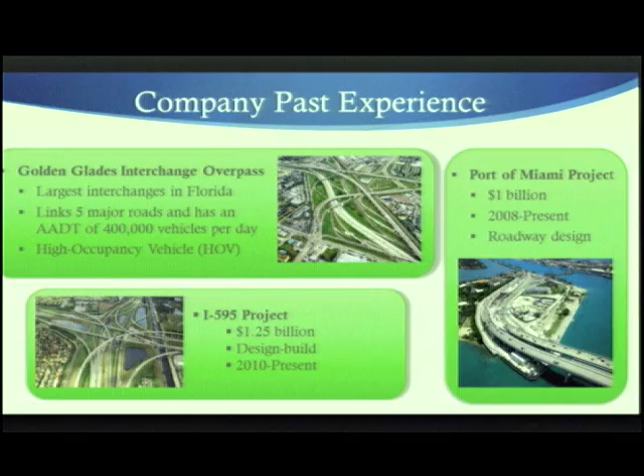Hi everyone, I'm Michelle Brioso. Today we'll be talking about our plans for the Bridge 5 Ramp F. It's a 2-lane ramp which will connect Spanish River and FAU Boulevard North to Interstate 95 northbound. In the following image, you can see Bridge 5 Ramp F highlighted in yellow. This project takes place in Palm Beach County, which offers a wide variety of living and recreational locations. In this county and in the nearby area is Florida Atlantic University. This university has seen a consistent increase in student population, and with that comes a need for expansion and a demand for this interchange.

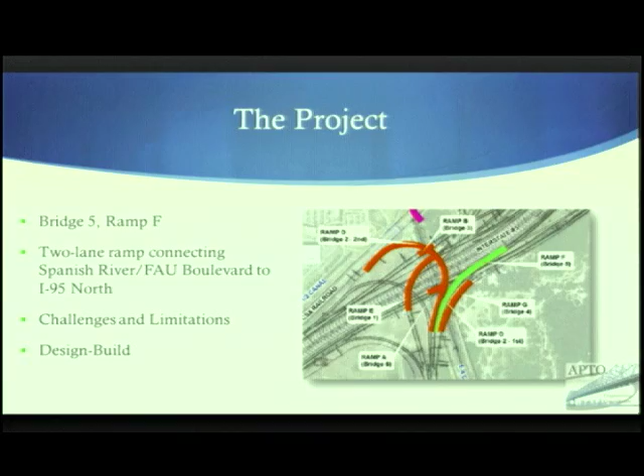Throughout this project, we're going to face several challenges and limitations, including the Boca Raton Airport and the crossing of the El Rio Canal. This will be a design-build project in which Apto Engineering plans to oversee all phases of the design and the construction. Through the construction of this project, Apto Engineering plans to create easier access routes and alleviate the traffic for those who attend the university and those who commute to and within the area. It is our goal to ensure that there is a safe and environmentally friendly working environment, not only for those who are working on the site, but those who are commuting within the area. We also want to minimize the public impact that this construction will have. It is our goal at Apto to ensure that the project is within the expected delivery time and within the proposed budget.

We also want the aesthetics of the bridge to fit within those of the Boca Raton area, and our intention is that the decorative features and the functionality of the bridge will help to increase property values of the adjacent zones. I'll now pass it over to Jake Van Dyke, who will discuss the scope of our project.

Thank you. Hello everybody, I'm Jake Van Dyke. I'll be the structural lead for this project. I'll be going over the scope of the project right now. First of all, APTO will provide all the design and construction related services for this project. We will work thoroughly with our clients from the concept phase all the way to the final design of the project and the release of the project.

Our company will provide the client with effective designs and make sure that these designs are put into reality using efficient construction methods. Our company primarily uses the critical path method to ensure minimal construction period times. Some challenges that we might encounter during this project are the actual construction of the bridge. As we see, the bridge crosses El Rio Canal. So pier number 2 of the bridge will be very close to this canal, so any extra support that we have to take into consideration for this pier.

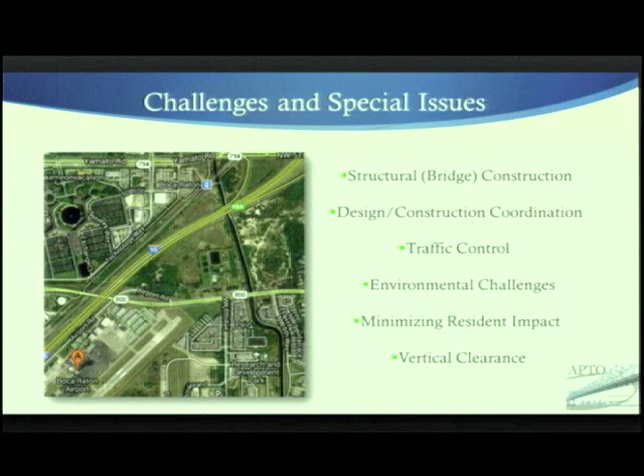In the design phase, our company will provide all the necessary investigative work so we can fully utilize the client's resources while exceeding the minimum engineering requirements. Our company will identify any inefficient designs or design flaws and propose to the client effective solutions. For this project, we will provide all the necessary documents and plans to ensure a hassle-free construction.

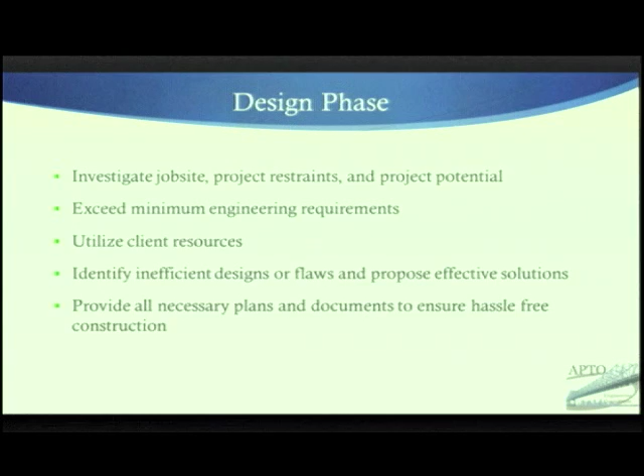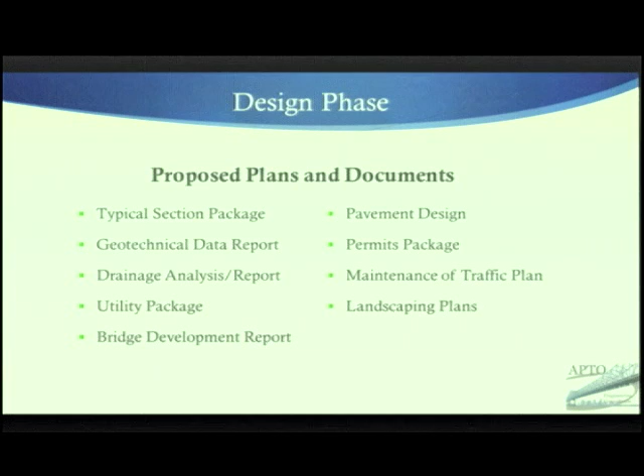Here you have a list of the documents and plans that we will be providing. As you can see, we will provide a typical section package. We will provide geotechnical report, utility package, landscaping, permits. As we said, all the details will be handled by APTO and its subcontractors.

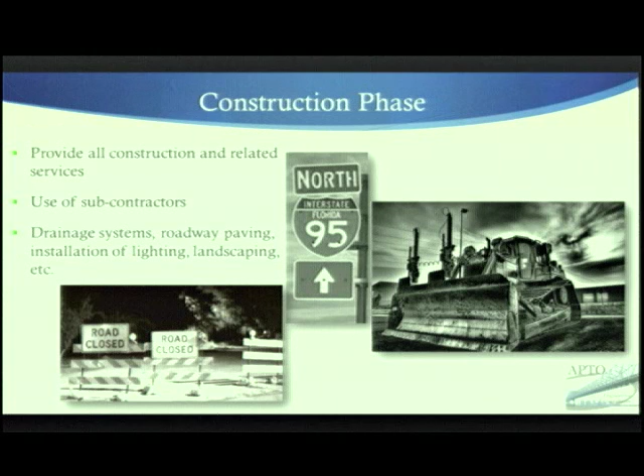The construction phase, as we mentioned, we will provide most of the construction services, and we will sub out some of it. We're aiming for at least 10% DBEs to ensure the FDOT 8.6% minimum. We will construct the drainage system, the roadway pavement, and the subcontractors will be used for the specialty services to ensure that these specialty services are of high quality, such as installation of lighting and landscaping. Now I will hand the floor over to Mr. Felix Santiago, who will go over the quality management. Thank you.

Thank you, Jake. As mentioned, my name is Felix Santiago. I'm going to go over the quality management plan and the public awareness plan. In order to ensure that we follow FDOT design and construction requirements, we have put together a quality assurance and a quality control plan. APTO prides itself in providing high quality work and exceptional job satisfaction. Some elements in which our quality management plan focuses on are detailed planning, coordination of construction and material sampling, teamwork and communication with the client, the community, and the company.

The project takes place in Palm Beach County in the city of Boca Raton. We have to account for the FAU campus, which is adjacent to I-95. In addition to that, some undeveloped property and industrial properties are also adjacent to I-95. We must also take into account the Boca Raton Airport, which is nearby, which will affect some of the construction requirements, as well as any residential neighborhoods and local businesses which are close by the project.

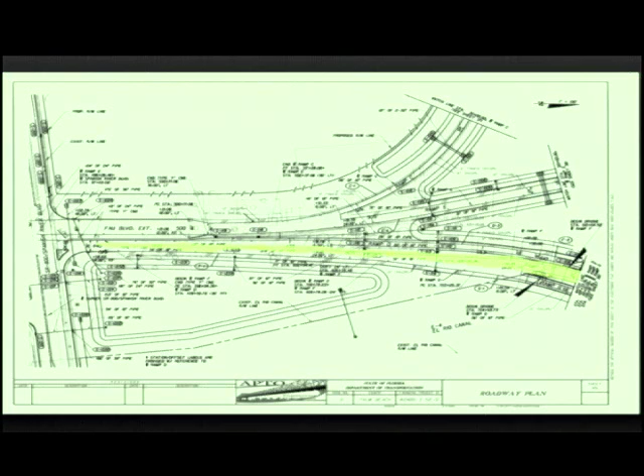The highest crane right now out there for 2013 is 179 feet, and we propose our bridge is about 33 feet in elevation. We will definitely stay within the minimum distance as coordinated with the FAA administration.

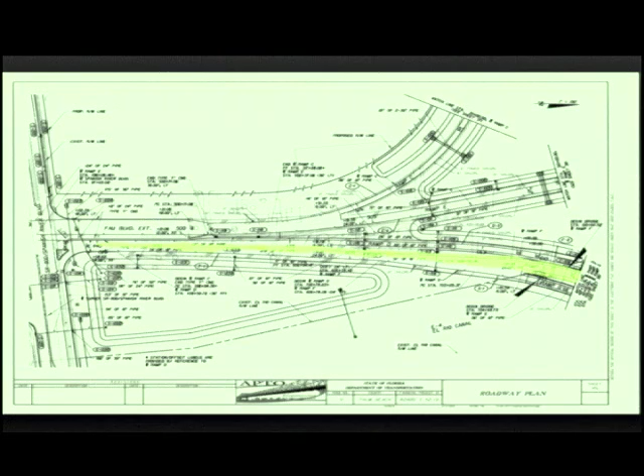Also, in order to guarantee a smooth transition from an initial 35 mile per hour design speed to 45 mile per hour design speed onto I-95, we will use a maximum super elevation of 8%, transitioning from about 400 feet from the start of our project to the end of our project.

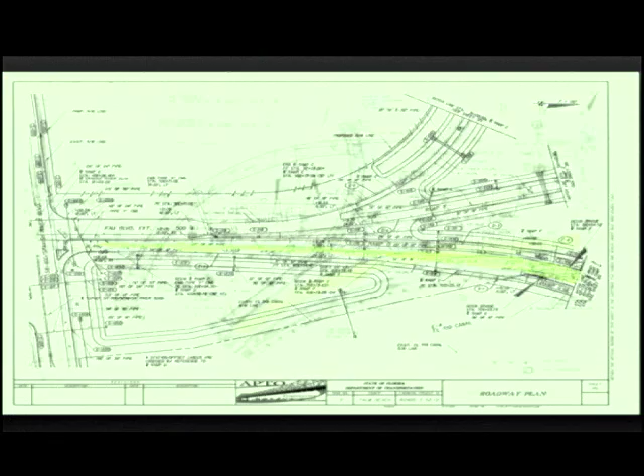Another problem that we will face, and we've addressed through this alignment plan, is the horizontal alignment. We must cross over El Rio Canal and Ramp A, which is another project proposed in this interchange. At the same time, we have to stay between Ramp G and Ramp D. So this alignment plan is the only alignment plan that we can take safely to achieve a smooth transition from FAU Boulevard to I-95. Additionally, we have the design speed requirements.

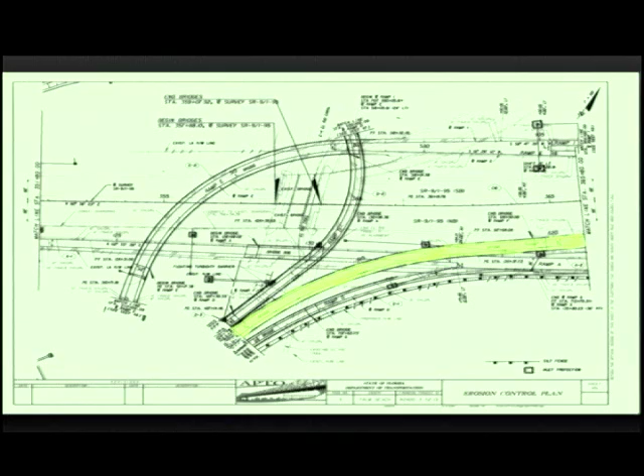As I mentioned before, the first 400 feet will be 35 miles per hour, and we will transition to 45 miles per hour. This image shows the beginning of our bridge, which starts at station 610 and is approximately 885 feet. At this point, we are at a super elevation of about 3, transitioning to 8%. I will now show you an image of our plan view for our elevation view for the beginning of our bridge.

One important factor in this image is that we are crossing El Rio Canal with 24 feet clearance, and this is exceptional because we will allow the continuity of traffic flow and not impede on the local biological system of the canal and allow for the maintenance of the canal.

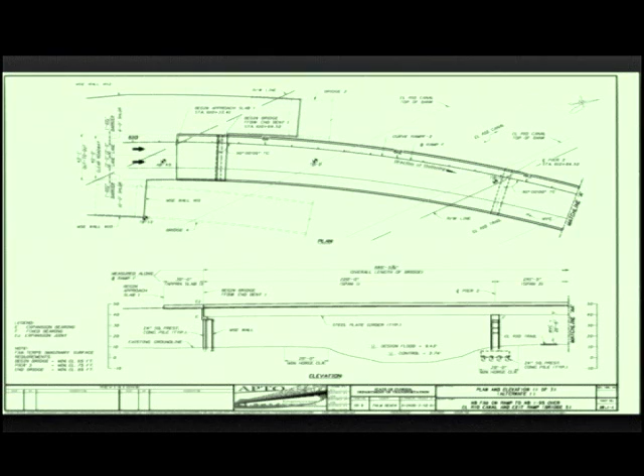In this image, we see our clearance of Ramp A, which is 17.5 feet above, allowing for traffic flowing north on I-95 into Yamato to clear our bridge without any collision. At this point, our transition for our super elevation begins to decrease from 8% to 5%.

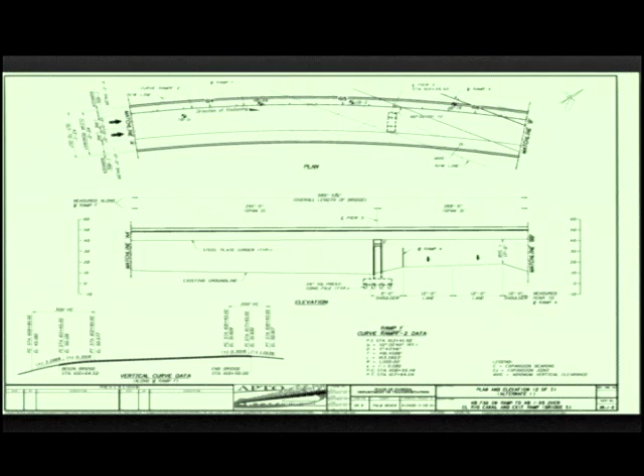At APTO, we've done many alignments like these in the past, as our project manager showed in the beginning of our presentation. Although this isn't a big project compared to what we've done in the past, we do understand the community's need, especially with the growing FAU University, and project that in 10 years, the average annual daily traffic will grow from 200 to about 250,000 vehicles.

This last image I will show you is our elevation view, transitioning from the mid-span of our bridge to about 154 feet into I-95. MSE Wall 17 we've designated to be 24 feet above ground level in order to allow a 5% decrease onto I-95, which will meet the stopping sight distance required by FDOT. Now, I will hand the floor back over to Michelle, who will discuss our scheduling and budgets.

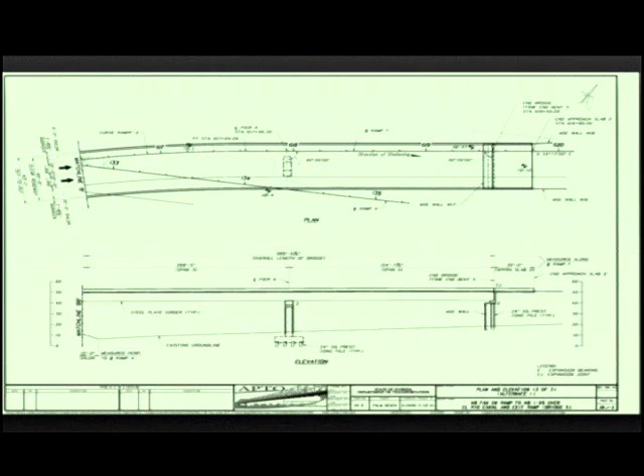Given that our design for the project would start immediately if we were awarded it, we're accounting for about 8 months of design, with construction starting at the 60% completion point and 10 months of construction. Construction will start in November of 2013. We're expecting for the design to end in February 2014 and the construction to end in September of 2014. We expect a 3-month overlap for design and construction between the months of November and February.

The total project time that we're estimating to get this done is 1 year and 3 months, given that everything goes according to our plans. I just want to emphasize that this presentation is an overview of our entire plan for the project, and if we are awarded the project, we will go into further detail on testing and the design for the project.